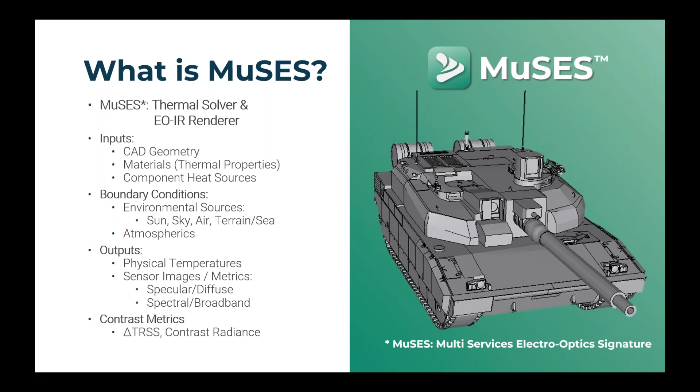MuSES is a complete thermal analysis tool, and that means that all modes of heat transfer are accurately computed to give a comprehensive thermal solution. Radiation between surfaces, radiation from the sun, and from the exchange with the background and the sky, view factor exchange between geometry and all the clutter in the scene, all of this is automatically handled. Convection can be accounted for in a number of ways, depending on the model complexity, and conduction is also included both vertically and laterally through the mesh.

Dual band radiation is employed during the thermal solve, so we deal with radiation in two averaged bands, one for the longer wavelengths involved in the face-to-face radiation heat transfer, and the other one for high intensity short wavelength sources such as the sun.

And we can also incorporate environmental effects on our simulated model. So with our transient solution, the position of the sun is going to be calculated for every time step. The view factor between the sun and the geometry will get recomputed. And the strength of the sun is going to change throughout the day, affected by cloud cover. So you're going to get direct and diffuse solar reflections off of geometry and terrain. And we exchange long wave radiation with the sky as well.

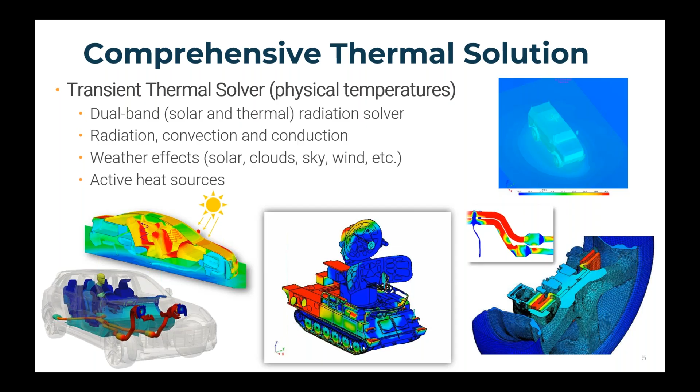And finally, MuSES has built-in capabilities to model heat sources like the engine, exhaust, cooling system, and electronics. And it can also vary the operating state or environmental conditions over time, which is very handy.

So here's a high-level look at the simulation process with MuSES, where we've got some target of interest and we acquire a 3D geometry. We prepare a surface mesh and bring that into the software. We then use the material database to specify the materials that different parts are made out of, the thicknesses of those parts, and any heat sources in the model.

And once that's done, the GPS location can then be set to capture the time of day, the season, day or night, and the weather data for the time of interest, as well as the mission profile, which we'll talk a little bit more about. But you know, whether the engine is on or the vehicle is stationary or moving.

And if you desire to move beyond physical temperature prediction, then you can input sensor parameters like the resolution of your sensor, the waveband, the field of view, the atmospheric profiles, and MODTRAN is used to aid in generating a sensor radiance rendering like you see on the right-hand side there.

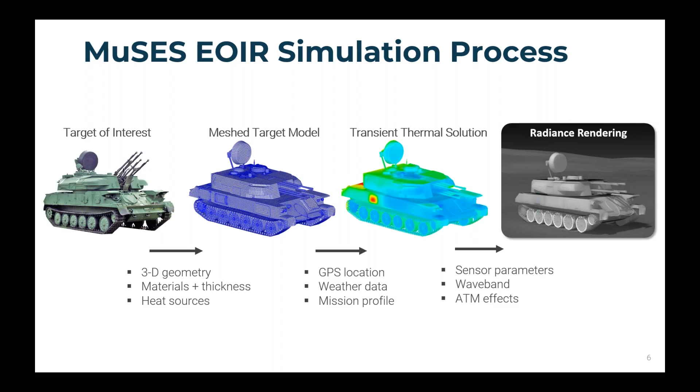So as I said, the inputs to MuSES are shown on the left here, and I've got some screenshots from the GUI that aid in attributing different aspects of the model as we work our way through the thermal model setup. So we can use the material database and optical property catalog to prepare each individual component of the geometry for thermal prediction.

So yeah, once the model is all set up and ready to run and the weather has been specified, the user is going to specify the start time and end time of the simulation. And it can also be a steady state run where just one temperature or one time step is predicted, and then the boundary conditions at that time are assumed to be infinitely present.

But most folks are interested in transient simulation where they specify a start time, they specify an end time, and a time step size in the middle. So physical temperatures can be solved for as frequently or infrequently as you want to get the fidelity required for your particular solution.

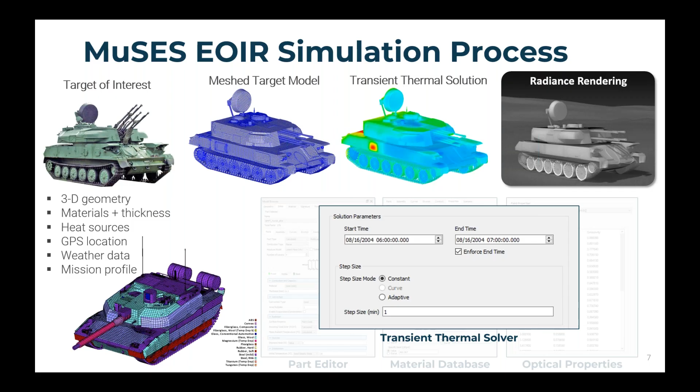So that's a quick synopsis of MuSES and how target models are set up for thermal prediction. Some of the screenshots shown here are the many different models we've created over the years. And there's a wide variety of different assets that you can contact us about if you'd like further information on how we can get you a model like this.

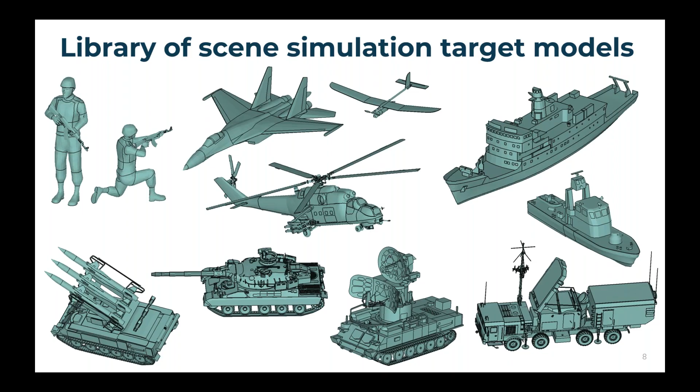But as you can see, we've got human dismounts in different positions. We've got tracked and wheeled vehicles. We've got maritime assets, research vessels. We've got drones, fixed wing aircraft, rotary aircraft. So it's a really wide variety of targets, and these are just a few. So yeah, we've got a very big library we've created over time that you can use to maybe get a jump start on analyzing a vehicle in different scenarios if you're interested in that.

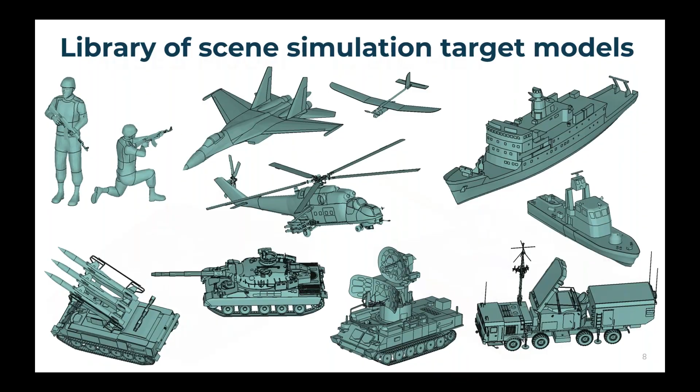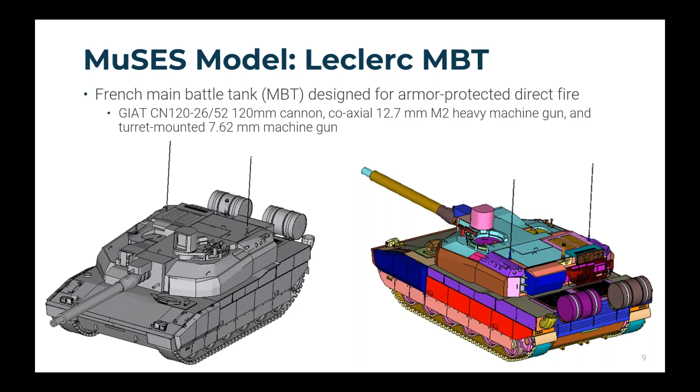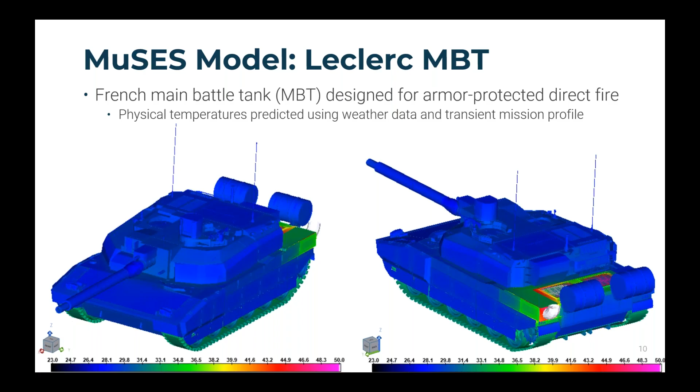And this should be more apparent in some of the examples we'll show later, but I just wanted to isolate the target and show some MuSES outputs before we hand things off to Pierre, and he discusses how these records get pulled into Oktal for co-simulation.

So yeah, the last slide that I just showed depicted a snapshot in time, right? But now we're going to talk about how MuSES can incorporate mission profiles and engine states for transient simulation over a diurnal period. So our software is typically used for transient simulation, and here we're going to be simulating just under an hour.

But if you look on the left, that top photo there depicts the engine state of the vehicle. So for this example, the engine is off to start, transitions to idle for 5 minutes, and then it transitions to an exercise state where the vehicle is in motion, stays there for a while, goes back to idle for 5 minutes, and then the vehicle shuts off for the final 10 minutes of the simulation. So it's kind of like a ramp up and a ramp down.

And then the curve in the lower left, that's the vehicle speed curve, which would be 0 for all phases of the mission profile except in the exercise state. So the vehicle starts moving at 10 minutes in, and this is accompanied by increased convection coefficients on the outer envelope of the geometry. The speed maxes out at 60 kph, and it looks like it maintains that speed for about 10 minutes. Then it ramps back down to 0 when the engine state transitions back to the idle and off phase.

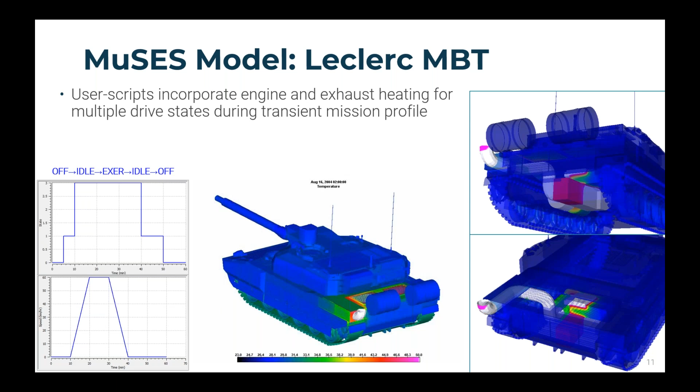And on the right-hand side of the slide are just some static images of the exercised vehicle state. And we've set a couple of the parts to be transparent, so you can get a good idea of what's going on inside the vehicle at its peak operating state.

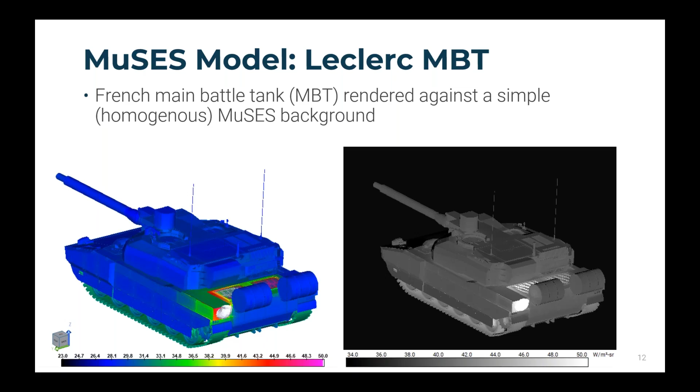But what if you want to insert this high fidelity target model into a much larger scene with clutter discretes and other high value scene variability? One thing you may want to do is combine this tool with another tool designed for that purpose. So this is the main motivation for coupling MuSES and Oktal-SE Workbench EO.

So on the MuSES side, MuSES is capable of high resolution 3D geometry for high value targets, where a lot of fidelity is required. It contains a comprehensive heat transfer solution, accounting for all modes of heat transfer. And it can employ active heating components such as engines and exhaust to dynamically affect the hard body and IR signature of the target with first principles physics and numerical methods.

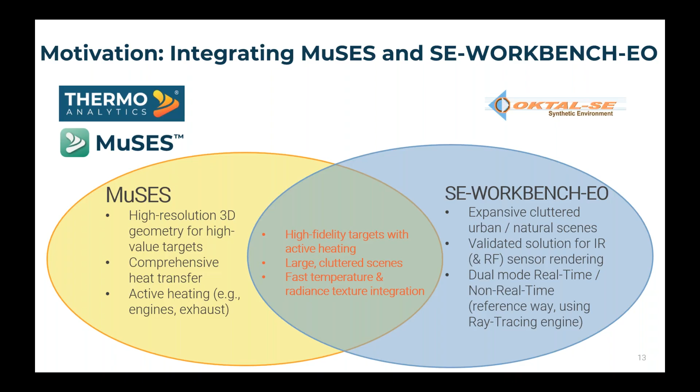On the SE Workbench side, that's capable of a wide area, expansive cluttered scene, both urban and natural. It's a validated solution for IR sensor rendering. And there are options for real-time GPU-based rendering, or the traditional rendering methods, which we'll cover in a second here. So when we combine these strengths together, we get high fidelity targets with active heating combined with large cluttered scenes, and also a fast method for sharing temperature and radiance information to get accurate outputs.

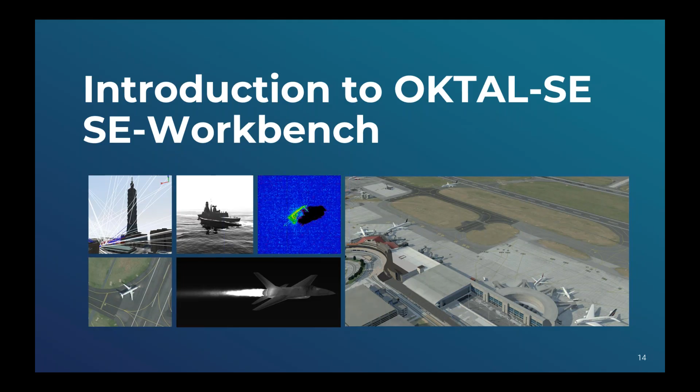Okay. So let's talk about what we do at Oktal. First of all, we like SE at Oktal-SE. We put SE everywhere, on our tool, on the name of the company. Our main tool is called the SE Workbench, which is, first of all, a software. This is what we do at Oktal-SE. We are a software editor, and its purpose is to provide physics-based sensor simulation in several domains, electro-optics and radio frequency. On the electro-optics domain, we cover visible and infrared spectrum, and on the RF, we do radar and GNSS.

Okay, so if we have a look at the SE Workbench, you can see examples of the outputs on the right-hand side of your screen: radar and infrared images, small or wider images. As input, first of all, we take 3D data for the whole terrain and for the targets. Then we have a database of material properties, which is validated. We have physical properties on several domains for a wide range of materials, and then we assign these materials to each element of the target and of the terrain. We will get back to that a bit later.

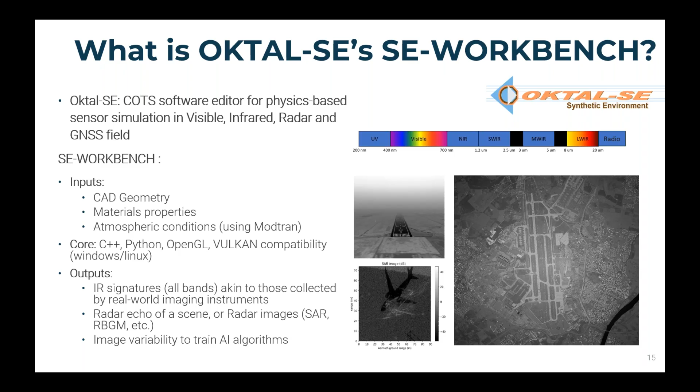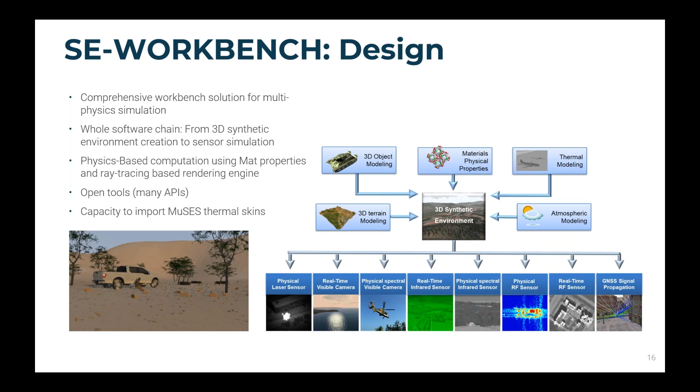So all of that will create input data that will be inserted in what we call the 3D synthetic environment. That's really the core of the process. From that, we can edit a scenario, and then we can do sensor rendering on several domains. So we can generate laser sensor images, visible images, infrared, radar data, or GNSS data. And the tool is quite open, so there is room for APIs at different levels. And there is also the capacity to import MuSES thermal skins.

Okay, so next slide. Here it's a view of what I've explained, but instead of seeing the bricks, the tools, we will see more the process of the workflow. So maybe I'm going a bit quicker on this one. But just to explain roughly, you can see on the screen that we first start to model a 3D terrain from 2D geographic data. The terrain can be ground or sea, it can be urban scenes or natural scenes. It can be quite wide as well, or quite detailed.

Then from that, this is where we do all the aspects of physics: the atmosphere, the temperature, the physical properties, sometimes some special effects. And this is also where we configure the scenario, sensor positioning, and we import the 3D objects. So from that, we have a ready-to-use synthetic environment. And from the sensor we have positioned, we will proceed to sensor rendering.

You can see on this diagram that there are two ways to do sensor rendering. One is based on ray tracing, and its idea is to be high fidelity. This is the one with the higher level of physical accuracy. And the second one is quite close in terms of rendering, but the priority is on the performance, so on the frame rate. That's based on different technologies, so-called rastering.

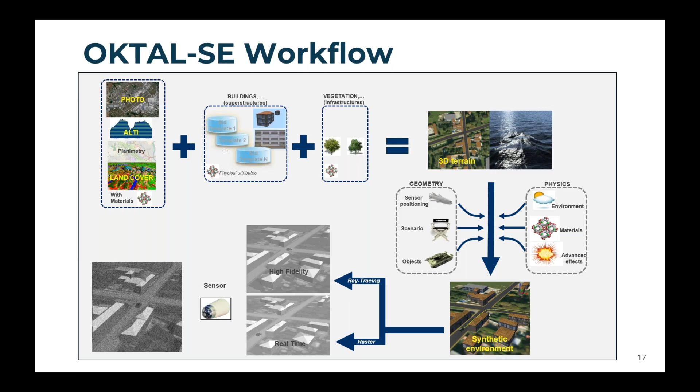And then this is what we produce before the sensor, and then we have modeled the sensor effect, as you can see, to add some noise or any specific effects of the sensor. This example is in the IR domain, but it's the same kind of process for any type of sensor. Okay, so next slide.

Right, so we have talked about what we do and how we do it. Now let's talk about the outputs. In terms of output, what you get is basically, as said, the physical signal before the sensor or the image after a sensor. Here we can see some examples. That can be, of course, on different spectral domains. We can see here some colored images. We can see some infrared images, so shortwave, medium wave, or long wave infrared.

We can produce some spectral images, so multispectral visible images, for example, radar images, some specific items such as water wakes, plumes, clouds, layers, etc. And on the images on the right-hand side, you can see that some are focused on specific targets, but others are more representing wide scenes: urban zones, industrial areas, airports, countryside, desert, sea, etc. So you have quite different types of environments. So that's for the output we produce.

But what about the use cases? Why do we produce that? We address different types of applications. We can mention one which is definitely a growing demand, which is to generate massive data sets for AI applications. Then we also have, as a use case, hardware-in-the-loop applications, where the real system is put in the simulation. Seeker development, vision-based navigation applications in the defense domain, but also in civilian aviation. Parametric studies are quite common as well, and enhanced vision systems for civilian aviation.

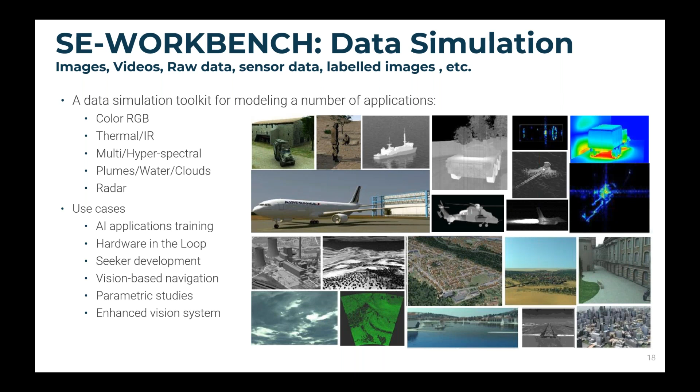So if we go to the next slide. Okay, so that's a few examples of the type of off-the-shelf terrain that we have. So we can model from scratch different backgrounds on demand, but we also have a catalog. So that's examples here of desertic terrain or Middle East type of terrain. Then we have a coastal area, rural area, and an airport. So that's examples of the kind of things we can model.

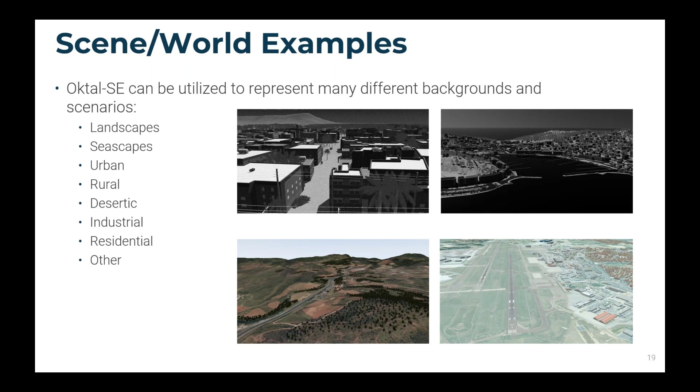Okay, so next slide. Right, so let's talk about now coupling our tools. So I mentioned that we have the tools to do the thermal modeling of the terrain, and I briefly mentioned that this is also applicable to targets. So for targets, we either consider that the target is static and not moving on the scenario for the past 24 hours, so we can consider it the same way as we do for the terrain. But mostly the targets will be dynamic objects.

And in this case, we have a thermal modeling tool, which is descriptive. So this is done via our tool called SE Physical Editor. The main idea is for users to be able to paint, let's say, a thermal skin. So if you have a look at the top right-hand side image, this car, we can see the temperature texture. So here the user has manually defined the heating zone.

So that's descriptive. That can be relevant when there is a low requirement for accuracy, or where you have prior thermal knowledge of the thermal signature of the target before doing the simulation, or when complexity is prohibitive, because this is quite straightforward. But you can face limitations when there is a high level of accuracy or where you need a physics-based simulation. So that's why the coupling can be relevant.

So here we have a summary of the processes of MuSES and Oktal-SE. It's quite similar in a way. Basically, we both start from 3D models from a real target. Then there is this material attribution. Of course, on the MuSES side, there are more parameters focused on the thermal modeling, whereas in the SE Workbench, you will have more parameters focused on the scenario setup, on the atmosphere, on the temperature of the scene, etc. But it's more or less the same type of process.

So then, the output you can see is the MuSES output with the different levels of temperatures, and we have the IR images as an output. And first of all, it's important to note that if we want to couple our two solutions, the first step is to define a common target and common 3D models we will use.

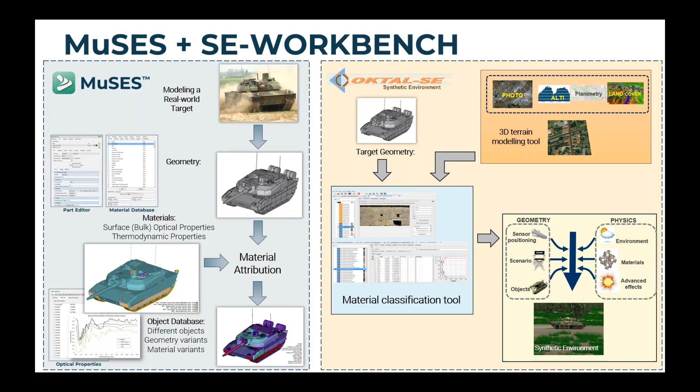So next slide. Here we see the integration of the process. MuSES would produce a TDF file, describing the temperature assigned to the texture and to the 3D geometry. And we will use that in Oktal-SE's SE Workbench as input data.

So first, if you look at the top of the right-hand side diagram on the Oktal-SE side, there is first a 3D model. We do the material attribution, but we import the thermal skin from ThermoAnalytics, from MuSES. And we use that as input information in our synthetic environment when we use targets in the environment and when we assign trajectories, for example, to a target.

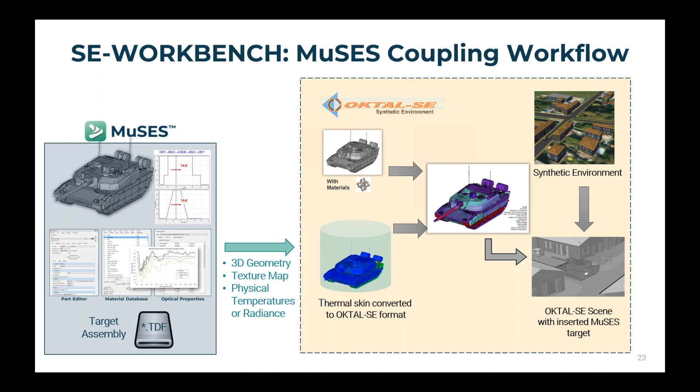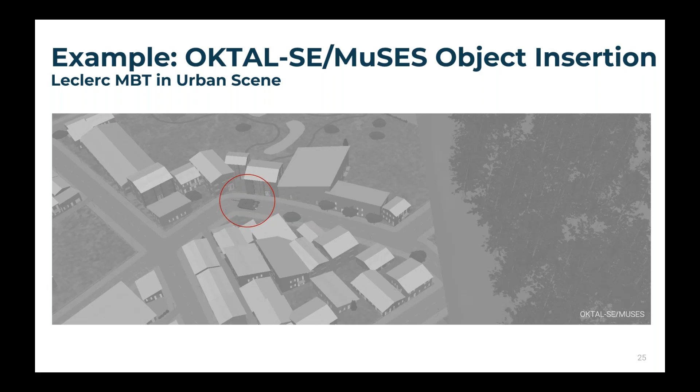So if we go to the next slide, you can see some captures of the images of this main battle tank on the road, and we can see the different levels of radiance. That's quite interesting. If you look at the roof, for example, the road, the pavement, and the target itself, we can see that it's quite precise, and that resembles what Scott showed earlier with the thermal modeling. So we can see that the radiance level matches with the exhaust and the engine, and all these heating parts. Okay, so next slide.

Here, this is another image, or maybe this is the video. If you press on, okay, sorry, I thought that was the video. The video is here. Okay, so here it's an animation we have created. So actually, that's a little further down. I think this is just an image. Okay, yeah, maybe. Okay. Don't worry. Spoiler alert, we're going to show you a nice video with this scenescape. So yeah, I'm excited. That's why I'm talking about the video.

Right. But yeah, here we can see the full picture. We can see some cars. We can see the tanks on the bottom of the screen, and we can see the wider area, urban area.

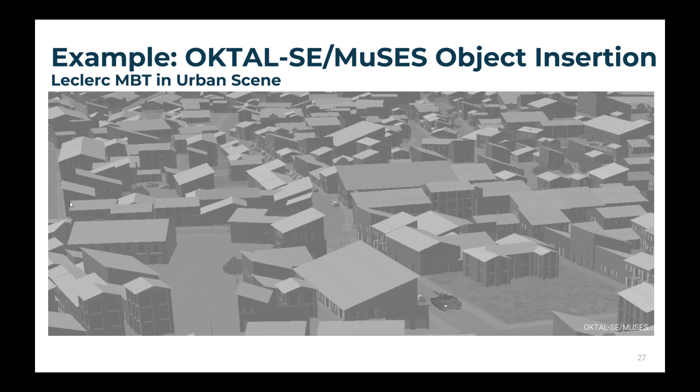Okay, so next slide. Okay, yes. That's the video coming. That's what I was excited about.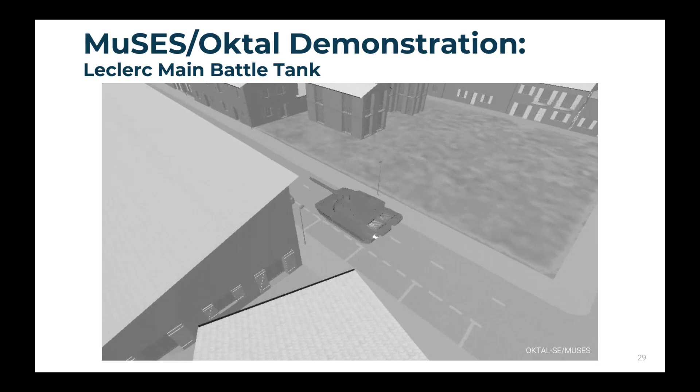Okay, so here it's on the same scene, and we have created a scenario with the tank being animated, and there is a kind of tracking mode of the camera. So the camera is tracking the tank, so we can follow the tank moving on the scene, and we can see the different levels of radiance. So that can be interesting for different types of scenario.

And if we go to the next slide, that's the same scenario, but with another view. Here, the sensor is fixed, is idle. And we can see like this flying view. So that can be suited for different types of application, like UAV detection, recognition, and identification. Well, when I say UAV, I mean sensors mounted on UAV. That can be also for any types of aircraft embedded sensors, applications, etc.

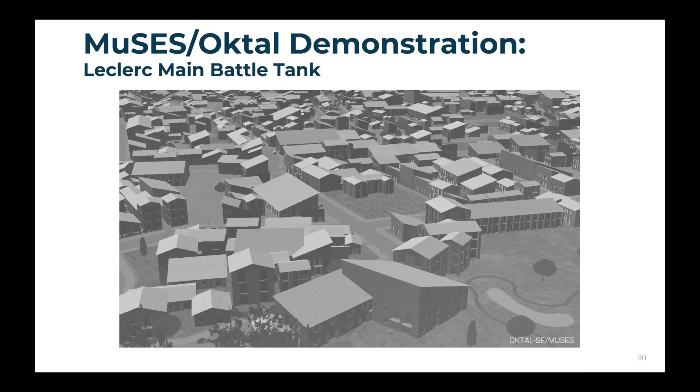So here the sensor is not moving, but as you can see, there are different types of scenario capabilities to make animation on the sensor, on the scene, or whatever you require. So on the next slide.

So here are the images we have computed of a drone. So we have this UAV, and we have computed different images at different stages of the heating cycle. So on the same background, we can see low, medium, and high level of temperature, and of course a very different radiance level of the drone.

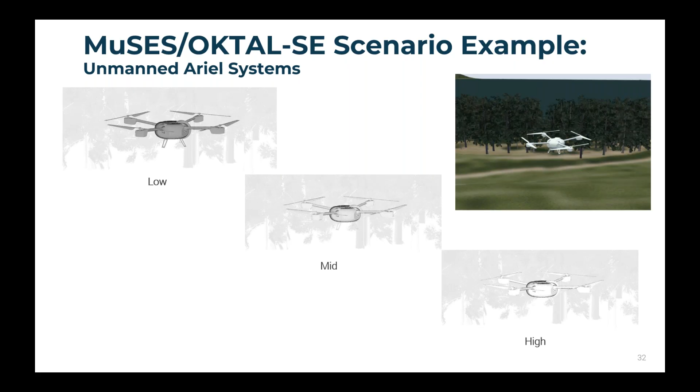Okay, so next slide. Here is another video of maritime targets. So that's a surface vessel. On the left-hand side, it's an RGB video of this vessel with the sea, the waves, etc. And on the right-hand side, it's not that easy to see. I don't know if you can see that on your screen, but you can see the waves around the ship. You can see the wake as well behind the ship.

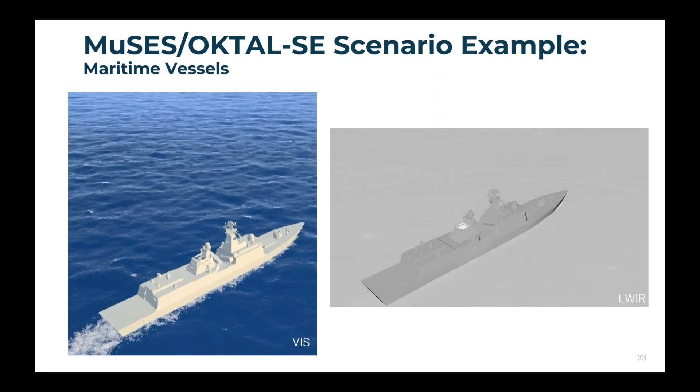And if you have a closer look on the ship itself, you can see the heating of the exhaust etc., which is quite accurate. Okay, so next slide. Okay, so I hand it over to you, Scott.

Great. Thanks for your concise summary, Pierre. So now we're going to wrap up by talking about some advanced and future applications and where this integration process can be applied going forward. If I can advance the slides here. There we go. Okay, so we picked 3 areas to cover briefly. The first is generating synthetic EO/IR imagery for AI applications. Then we'll touch on vehicles in motion a bit. And then we'll talk about future possibilities for a joint signature accuracy study.

So the first topic, generating synthetic imagery for AI applications. It's generally understood that machine learning algorithms can be trained to automatically recognize a target, but you need a large data set with lots of variation in the imagery in order to train the ATR effectively, like changing the number of pixels on target, the aspect angle, time of day, season, other sensor parameters, etc. And it's usually difficult to find sufficient measured imagery in the IR with enough variation. So using synthetic imagery is a good way to fill this gap, or even supplement the gaps in measured images taken on a field test.

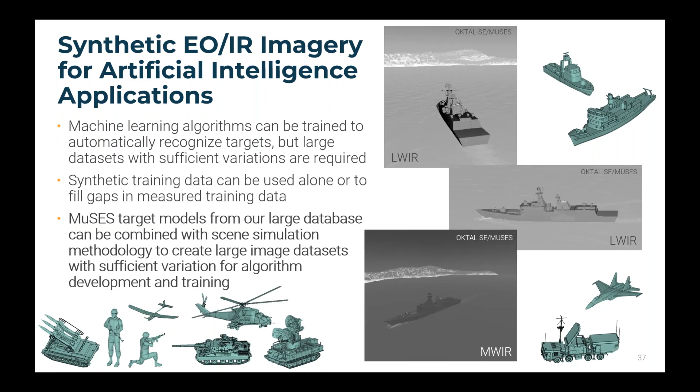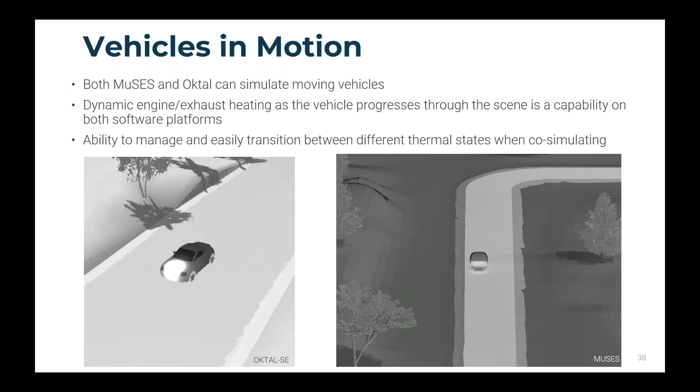The next application is vehicles in motion. And so both Oktal and MuSES can simulate moving vehicles. So on the right is for MuSES alone. So that's a MuSES background and a MuSES target of a passenger vehicle driving down the road and turning around some trees. And on the left is a standalone simulation from Oktal-SE, showing a moving vehicle that transitions from an off state to an exercise state, using their simple thermally descriptive approach.

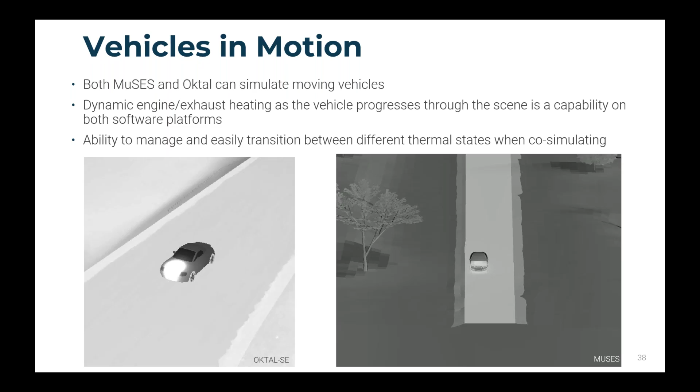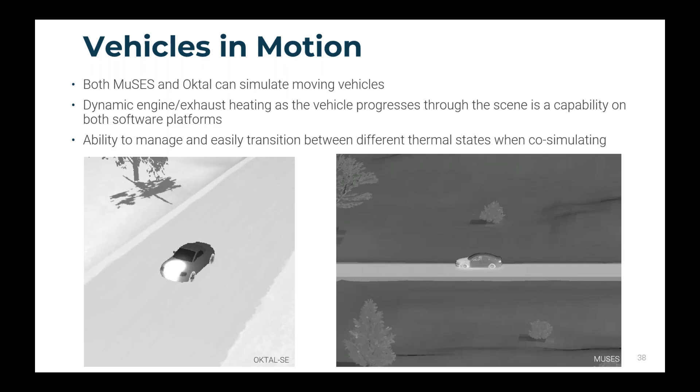And when the coupling process is used, it's possible to manage the transition between various thermal states. So the OSE tools allow the user to progressively switch from one thermal state to another. So any exported thermal states from MuSES, either temperature or radiance information, can be imported into the Oktal environment to allow this transition to accurate thermal modeling while taking advantage of Oktal's rich 3D scene definitions.

So something we could do in the future is pull these evolving temperature records from the MuSES car, which relies on waste heat power output as the vehicle progresses through the scene, and apply them to the Oktal model on the left.

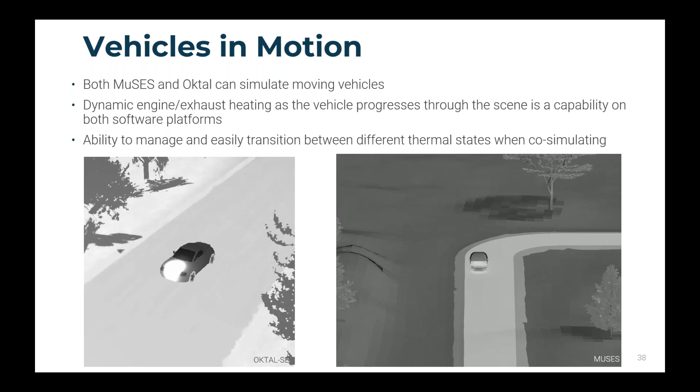And another one of the future applications that we've discussed is putting some effort towards a signature accuracy study, where we would use one of MuSES's radiometrically correct target models and a physically realistic background from Oktal to do a comparison against measured field test imagery. So this could be useful as a proof of concept for both customer bases.

And we would likely identify and agree on an appropriate field test data set that's maybe readily available to the public, maybe from a NATO study or something of the like. So it can be easily distributed and shared by both US and international defense communities.

So to wrap things up here in regards to the MuSES Oktal-SE coupling process, the strengths of MuSES are the high resolution 3D geometry we can handle in an accurate way that takes into account all modes of heat transfer to come up with a very comprehensive physical temperature prediction for high value targets, and the ability to include active heating and mission profiles in our simulation to handle the level of sophistication our customers expect or require.

And the strengths of Oktal, as we showed earlier, can handle large, expansive, complex, cluttered scenes. It has an industry verified physical rendering schema that is widely accepted by the EU community, and it can handle intricate sensor platform motion to easily render chipsets or IR video output. So when combined, we can capture the strengths of both tools to incorporate high fidelity targets with active heating into expansive cluttered scenes with the process that we've outlined today.